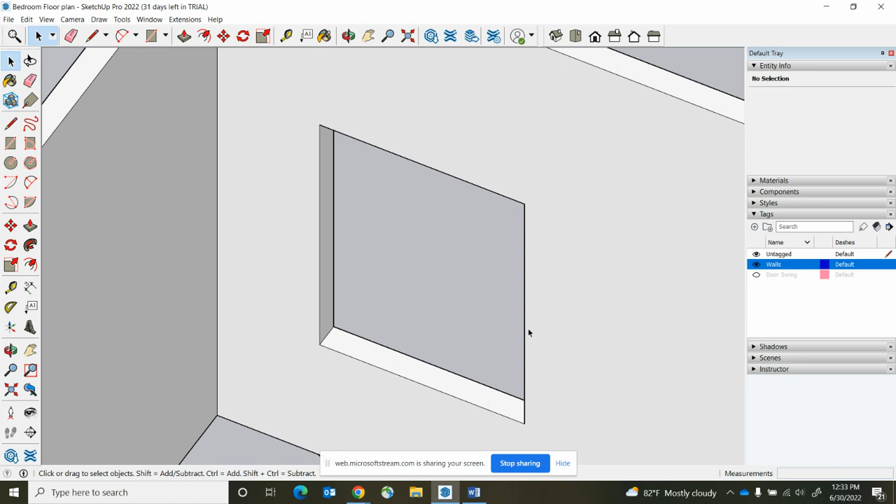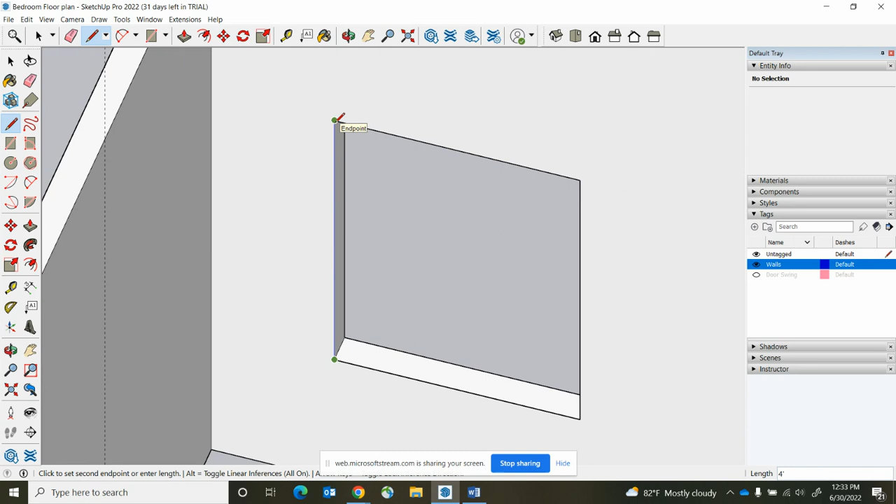All right, next we're going to work on our windows. And these are going to be done just a little differently than our doors. So first I'm going to start by tracing the front side of this window. And you're going to make sure you're always on a blue or red or a green axis. Make sure your lines are colored. So you see that's created a square for me.

So that allows me to use my offset and to bring out the trim 3 inches. So that's much quicker. Because we're going on all 4 sides, we can do it that way and it makes it very easy. I'm going to delete the inside of that. And then I'm going to push pull my frame out. We're again going to do 3/4 of an inch.

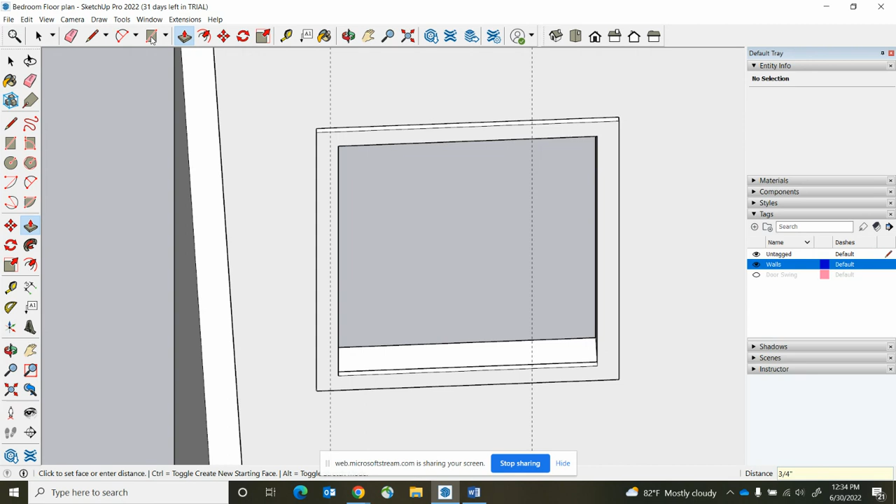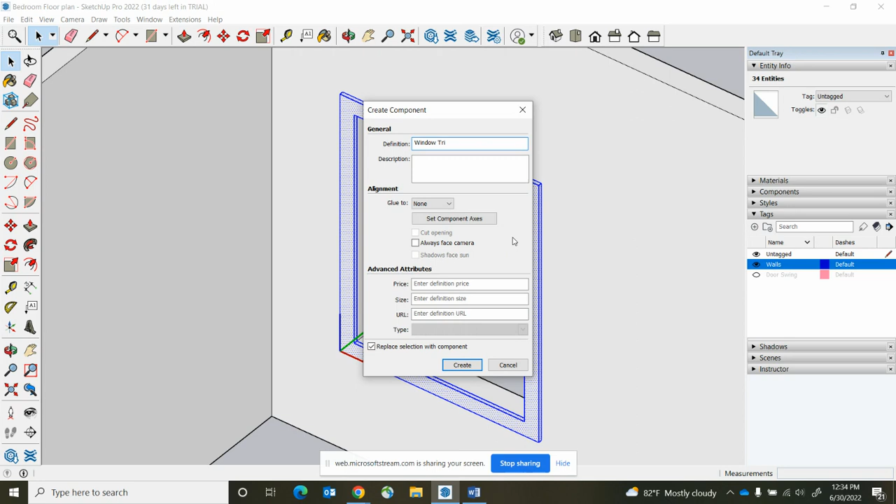All right. Now we're going to make this trim piece that we just did so that we can copy it and paste it over. So to do that, I'm going to triple click it. I'm going to right click, but instead of make group, I'm going to go to make component. Okay. And we're going to call it window trim and just hit create. So now what that allows me to do is I can say Control C for copy and then Control V to paste it.

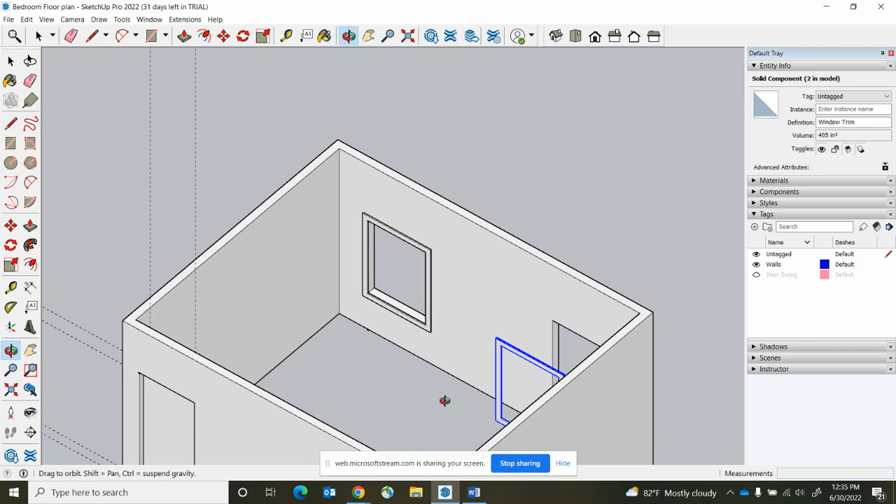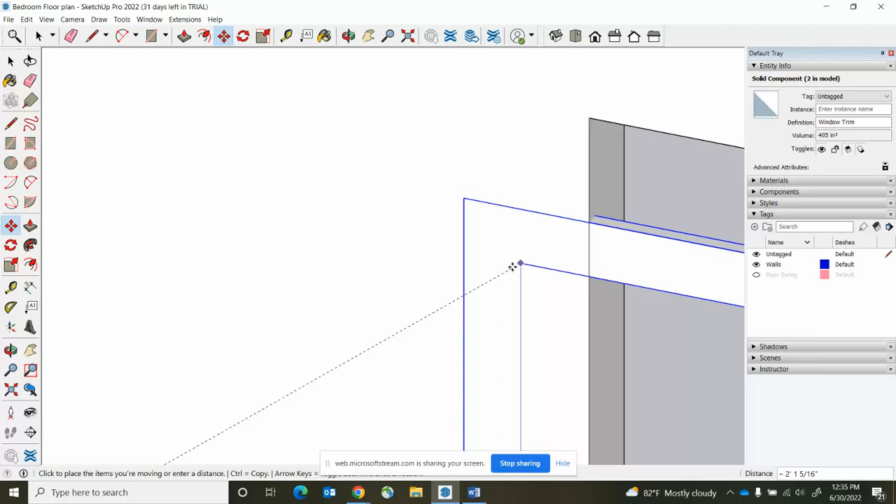And you're going to kind of drop it anywhere, because then what I want to find is the inside corner of it. Here, let's get it close and then we'll see. It's not wanting to cooperate with me.

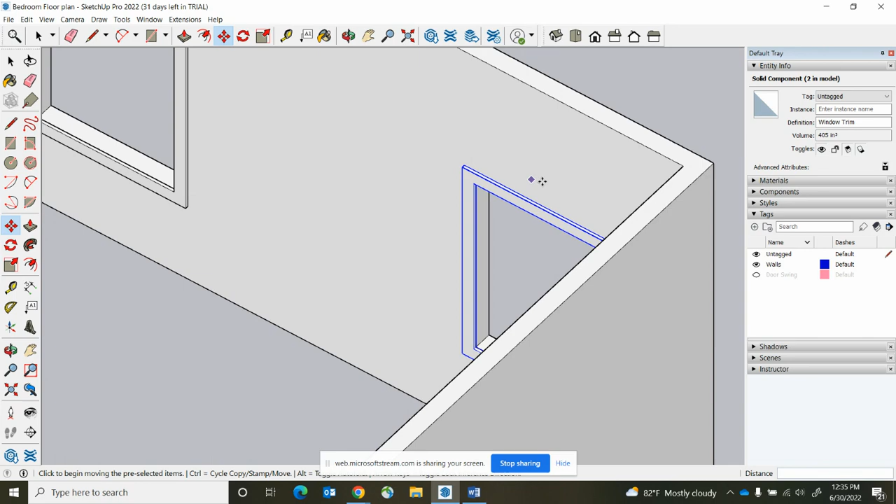Okay, so let's turn it around so we can find the corner that I want. I want this back inside corner, and I'm going to match it up right there with that corner of the wall. So now I have my trim done on both of them. Okay, makes it nice and easy. All right, so that's make component. We're going to use that again.

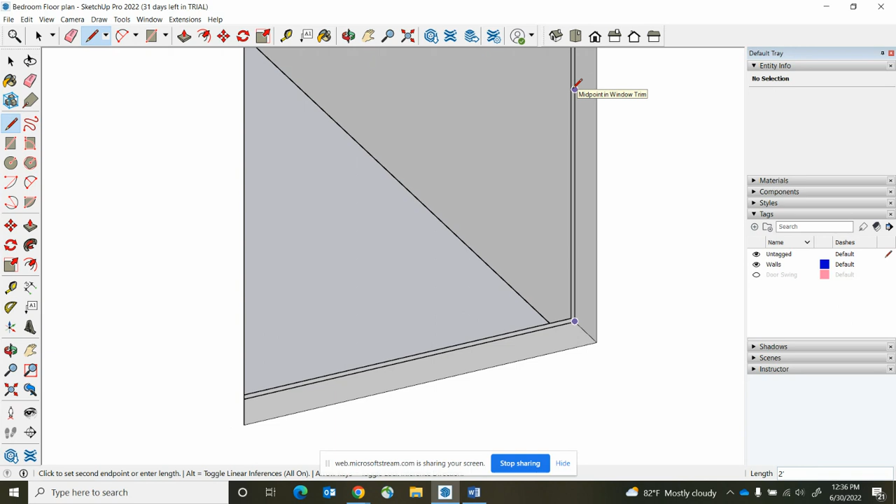We're going to turn around to the outside. Again, this just makes it easier to draw sometimes. I am going to start from the front side of my wall, not the front side of my trim, but my wall point right here. And I'm going to come up to find the midpoint of my window, because we're just going to do a double hung. It's the easiest one to find. All right, midpoint.

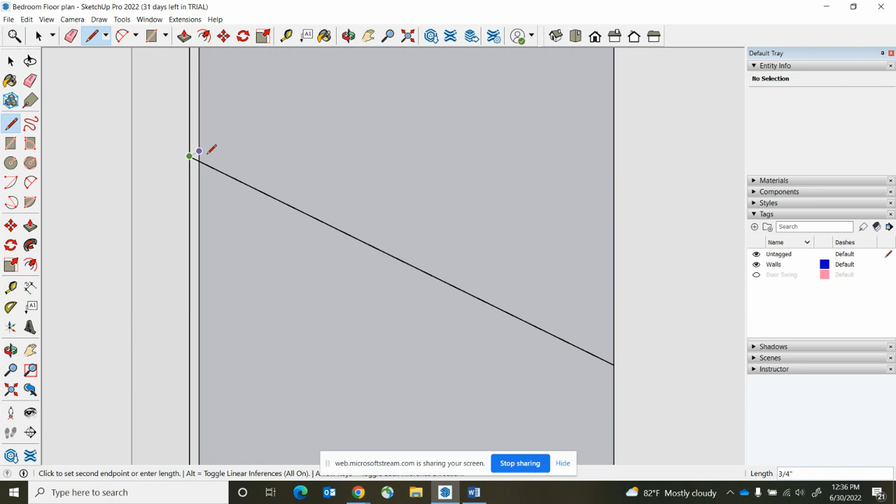Now I want to make sure it's a red axis. I'm going to rotate it. Again, keep it on that red axis. Midpoint there. Come down here so I can make a full shape. Okay. I'm going to orbit just to check and make sure it's where I want it. So yeah, it's all on that kind of inside line there. Nothing looks crooked. Okay.

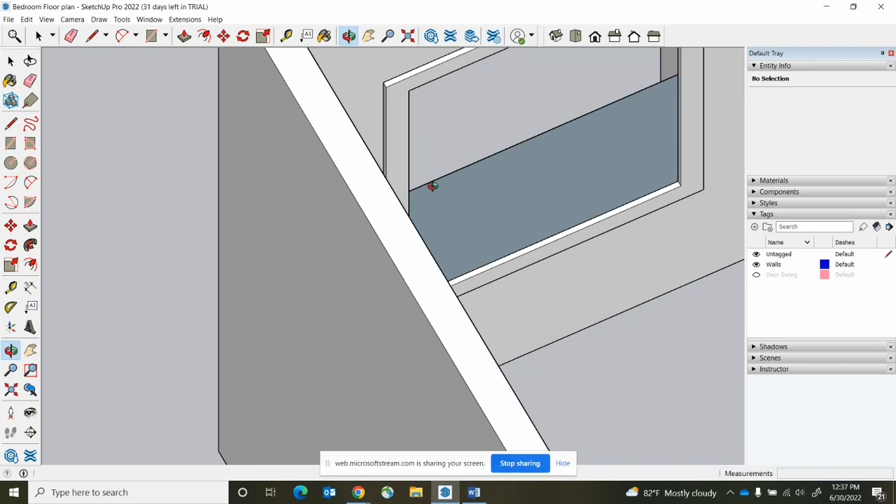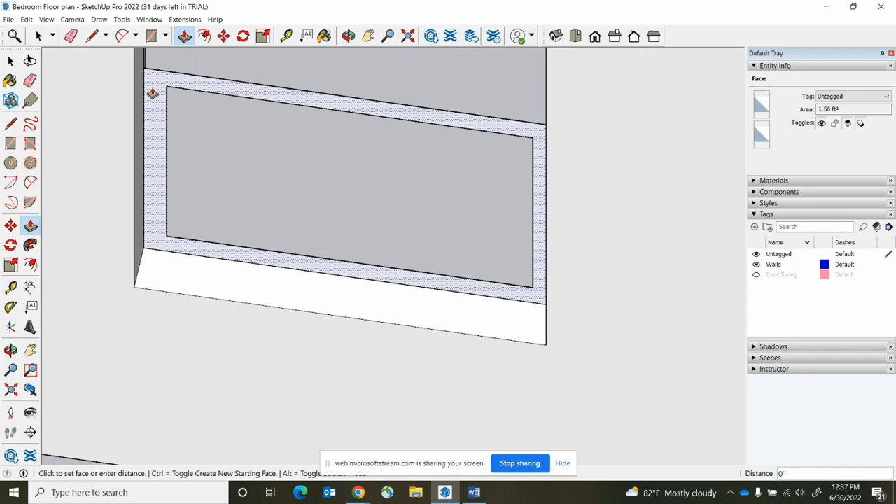So now we're going to come in and we're going to offset again. We're going to come in 2 inches because we're creating the frame. Going to delete that center portion. Okay, and then you're going to use your push-pull. We're going to do 2 inches. And we want to rotate around to the front with that, okay? So we've got that.

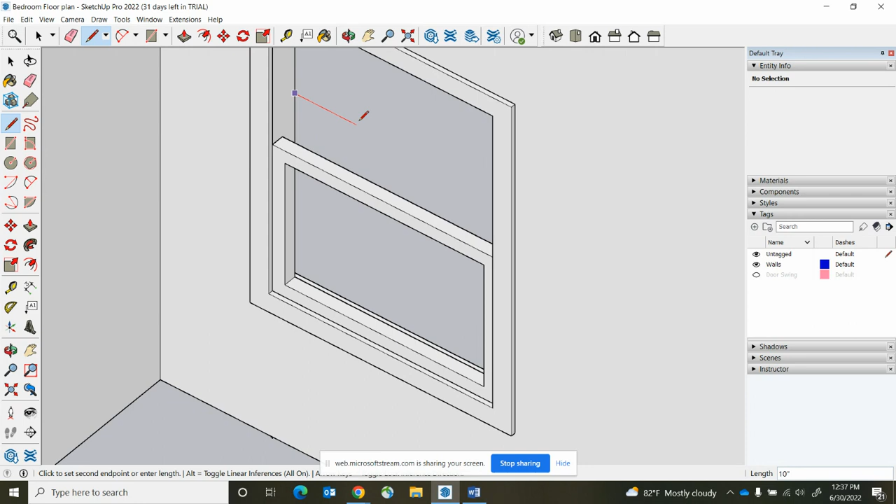Now, sometimes when you're doing push-pull, let me see if I can get it to do it real quick. Sometimes when you're doing it, it doesn't create a solid line. It will create a hollow line. And of course, I can never get it to do it on purpose.

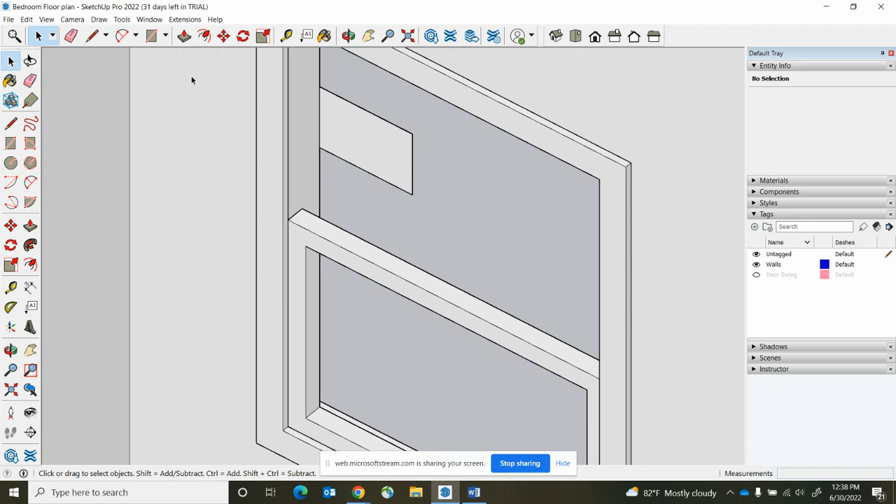But if it does that, if you were to flip it around and this is hollow, what you want to do is you'll undo. You'll hover over it. You're going to hit the control button. So that little plus sign pulls up, and then you can go and it's going to make it a solid piece that you need. All right. So if you have that happen, that's what you want to do. Okay. So we're going to come back to this.

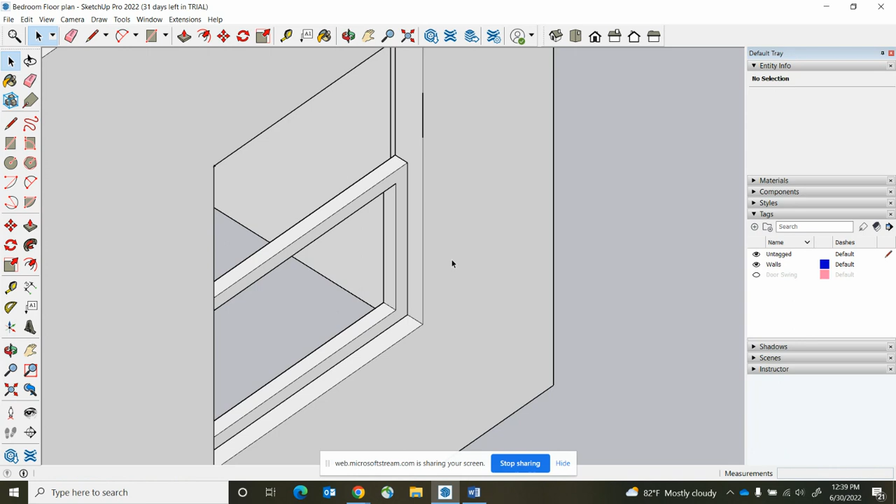We are going to triple click it and again, make this a component, and it's going to be the window frame to create. And now, again, I'm going to go to the back side so I can see. I'm going to Control C, Control V over here. And what we want for this one is I actually want this front window frame to line up with the back of this one so that in real life they could slide past each other as they go through.

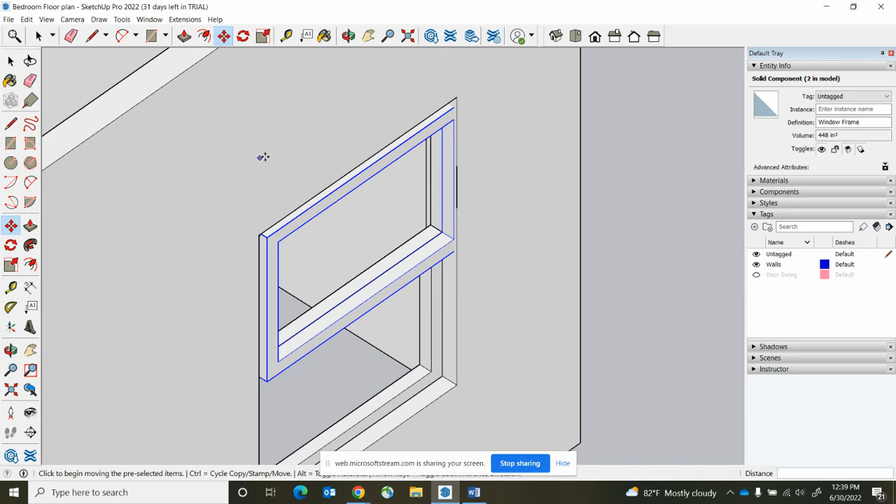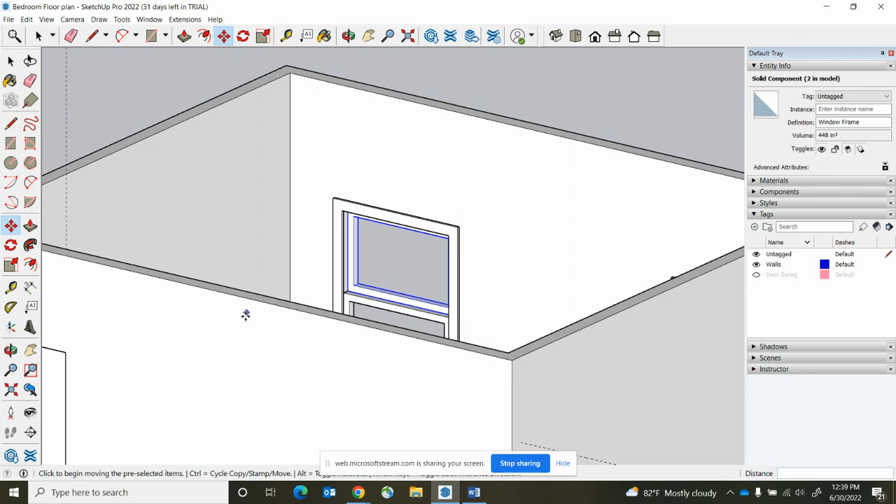Okay. So let me check. It looks like I might be off a little on the inside. I am. So I'm just going to move these again. Let's see if I got it right that time. I think that looks correct. Yep. Okay. So now you have your double hung window there.

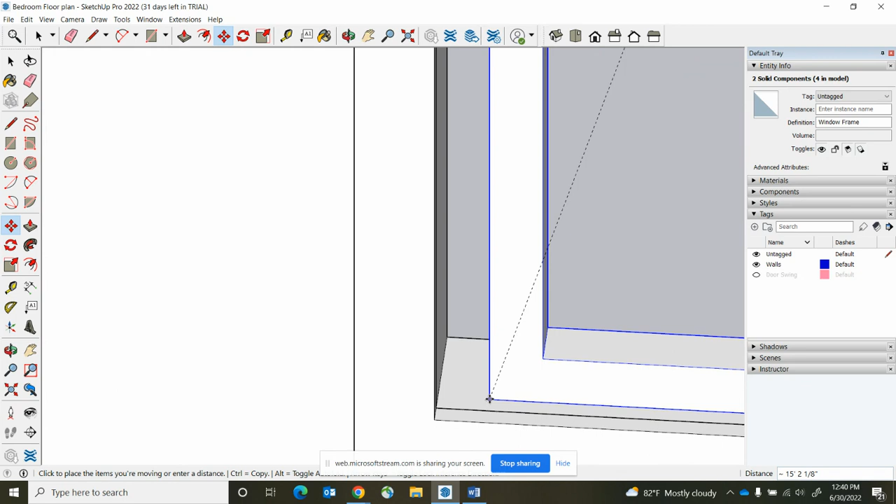And since, again, these are components, I can actually copy, choose both of them, Control C, right here, and Control V. And I can place it, again, in my window that I had here, and it's done. Okay, so much quicker to kind of get it all done at one time. So go ahead and finish up your windows and your doors.